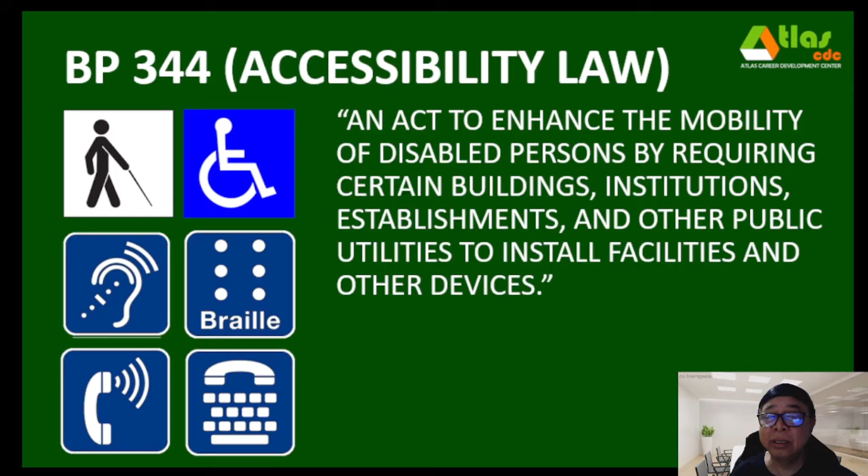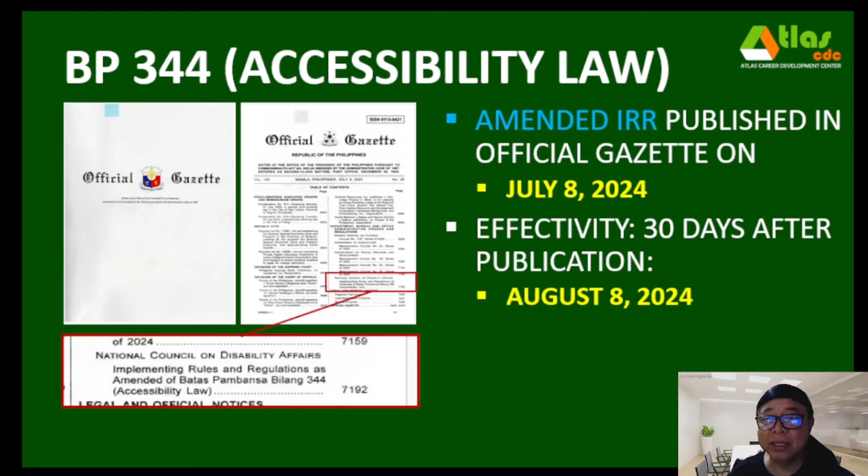BP344 is an act to enhance the mobility of disabled persons by requiring certain buildings, institutions, establishments, and other public utilities to install facilities and other devices in consideration of persons with disabilities. The IRR of BP344 was amended and published in the Official Gazette on July 8, 2024, and became effective 30 days after publication, on August 8, 2024.

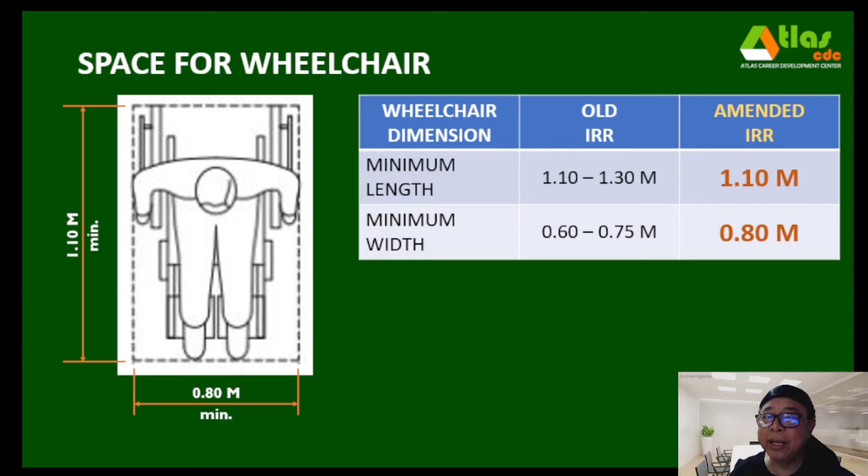So let us start with the new provisions, and this is on the anthropometrics pertaining to the requirements for wheelchair spaces. The new or amended IRR now requires that the wheelchair dimension will have a minimum length of 1.10 meters and a minimum width of 0.8 meters, compared to the old IRR which is of smaller dimension. This wheelchair dimension is to be used when planning for spaces where movement of wheelchair is required.

So if you have spaces for wheelchair, the minimum clear space to accommodate one wheelchair and one occupant will have a 900 mm width, in consideration of the 800 mm width of the wheelchair.

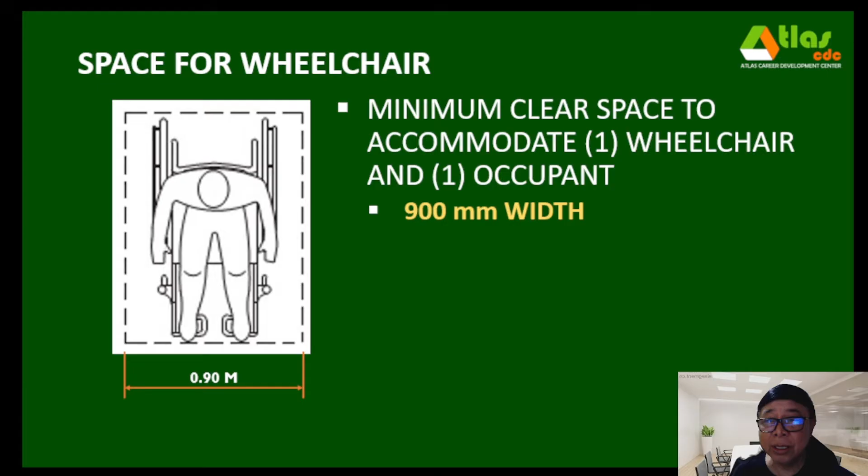For the turning space of wheelchair, this is the circle diameter turning space. The diameter now is at 1.8 meters, compared to the old IRR which is at 1.5. So we now have a bigger turning space.

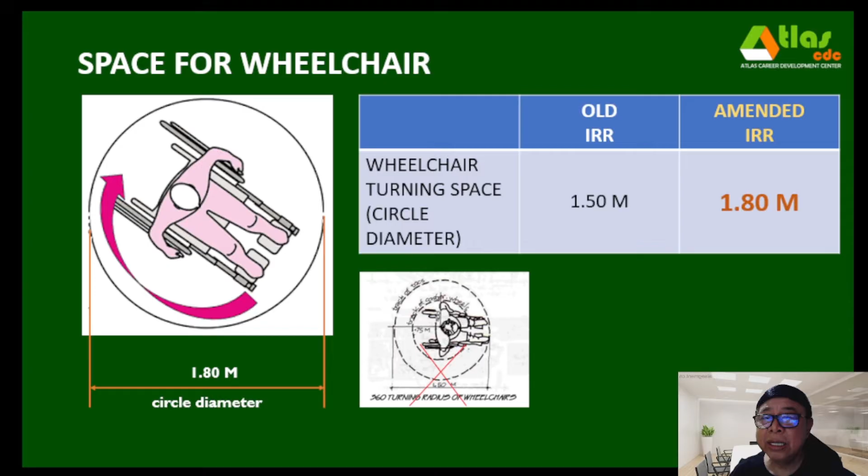For the comfortable clearance for knee and leg space under table, the minimum clearance here for table will be 0.70 meters, which is lower than the old IRR of 0.74.

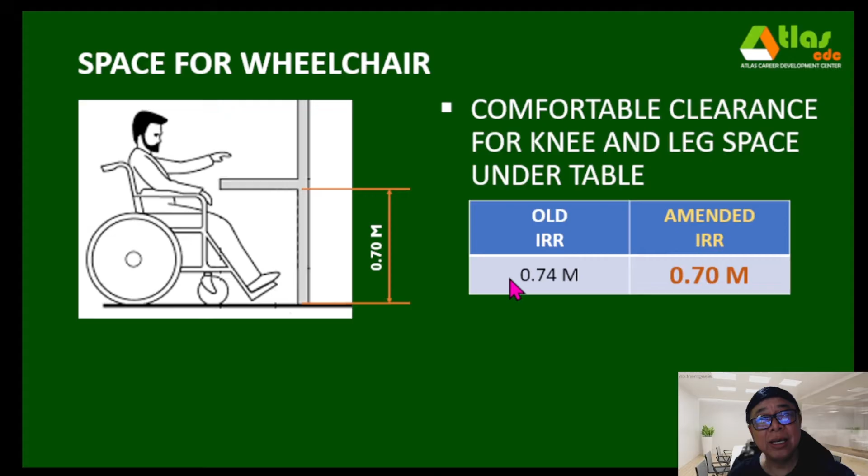Now for the reach of wheelchair users, 0.70 meters to 1.2 meters above the finished floor, and not less than 0.4 meters from room corners, for vertical forward reach. So if you have the wheelchair here, the forward reach, the maximum height is 1.2 meters above finished floor line maximum reach, and the lowest reach is 0.4 meters. This is the same as the old provision.

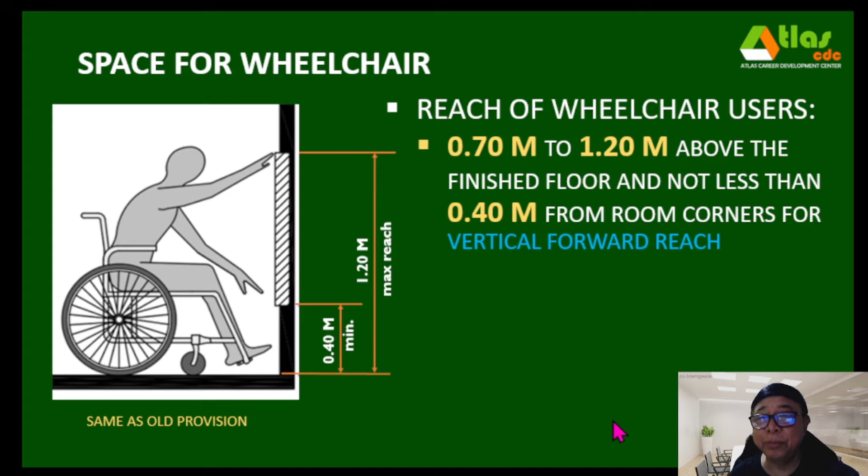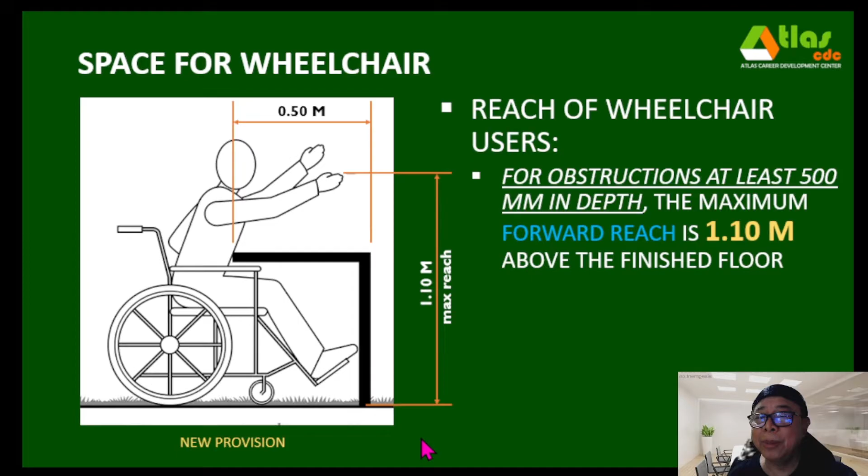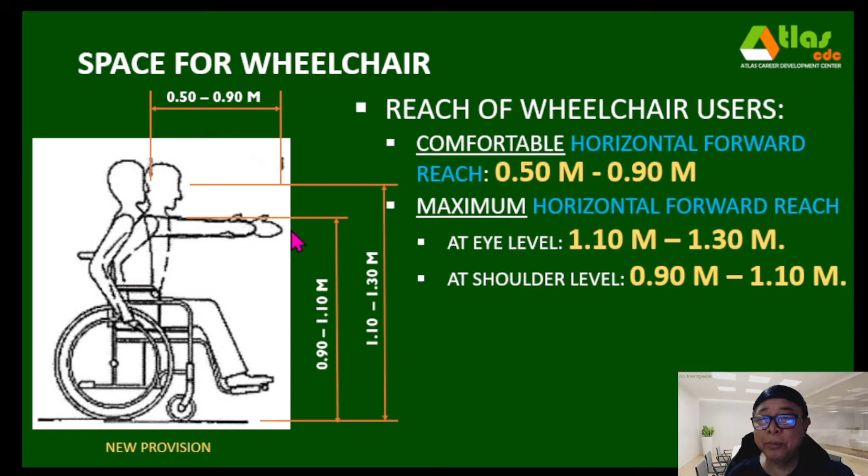On the other hand, a comfortable horizontal forward reach for wheelchair users will be at 0.5 to 0.9 meters. Comparing that with the maximum horizontal forward reach at eye level, that will be at 1.10 up to 1.30 meters, while the horizontal forward reach maximum at shoulder level will be at 0.9 to 1.10 meters.

For the side reach without obstruction for wheelchair users, the range will be from 0.2 as the lowest reach up to 1.30 meters above the floor for the maximum reach. So sideways, up to 1.3 meters, and the lowest reach here will be at 0.2 meters.

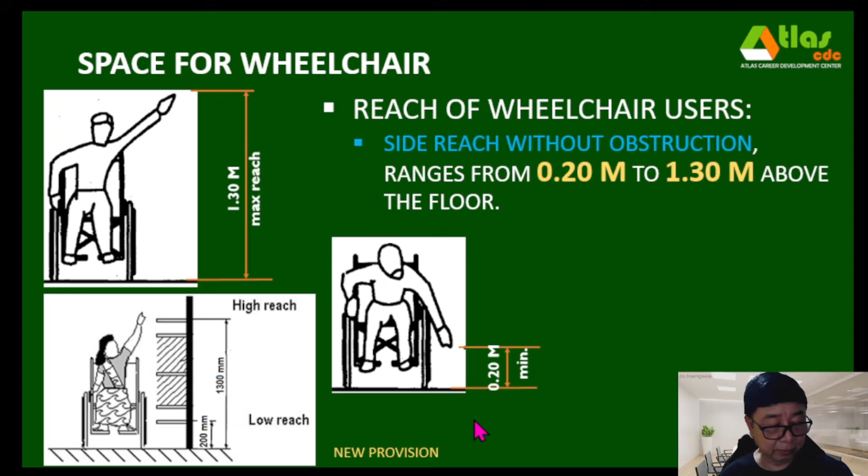For assembly places, we are to provide appropriate wheelchair seating spaces. So if you have a seating capacity of 4 to 50 seats, then you have to provide a minimum of 2 wheelchair seating spaces. And if the seating capacity is 51 to 300, you need to provide 4 wheelchair seating spaces. And if the seating capacity is 301 to 500, then you need 6 wheelchair seating spaces.

Take note that when seating capacity exceeds 500, an additional wheelchair seating space shall be provided for each total seating capacity increase of 100 seats. So it means that if you have 600 seats, then you need 7 wheelchair spaces.

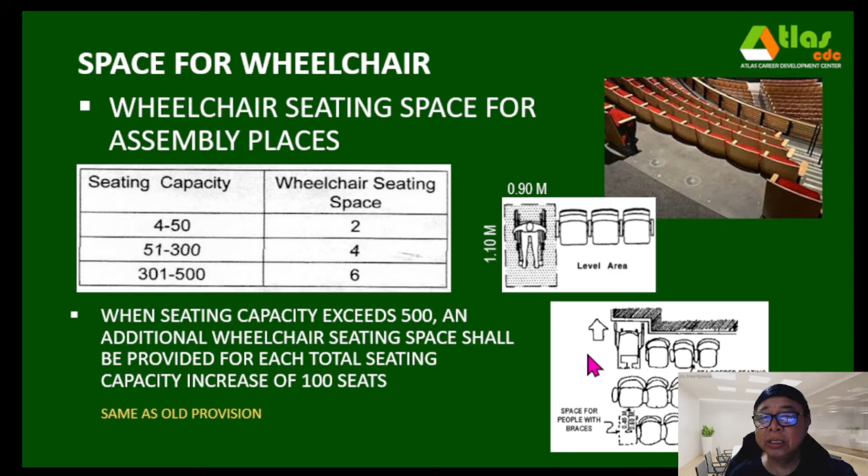The wheelchair space that you are to provide must have a width of 0.9, as mentioned earlier, and the length will consider the length of the wheelchair at 1.10. Usually, the wheelchair space shall be provided near the exit ways.

The next part of our discussion will be on the barrier-free facilities and features. So here we are going to discuss the accessible routes, and that will include ramps and stairs, drop sidewalk, drop curb, curb ramp, and curb cutout. These accessible routes shall be established within the 500-meter radius of the facility.

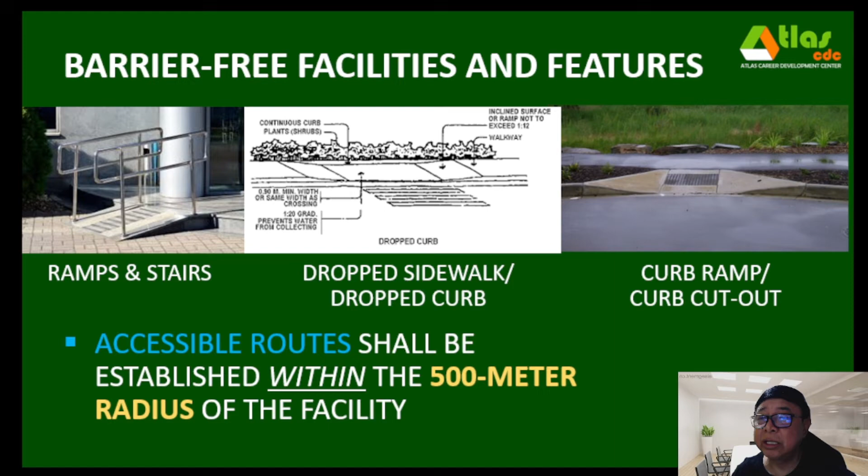So for this video, we will only be focusing first on ramps and stairs, and then we will discuss in the next video our requirements for drop sidewalks, drop curbs, the curb ramp or curb cutout, as well as parking spaces or the barrier-free facilities outside of buildings. So for now, we will concentrate first on the discussion for the requirements for ramps and stairs.

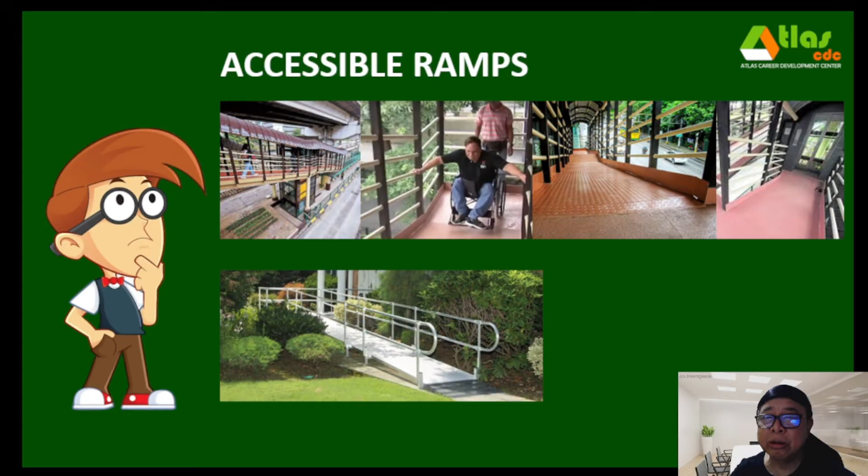For accessible ramps, we have to check the different components of ramps. If there will be changes in level, you are required to provide a ramp, except when it is already served by a drop sidewalk, a curb ramp, an elevator like this, or a mechanical device like this. So you have stairs, and you may not need to provide a ramp because you already have a mechanical device here, and this is a curb ramp.

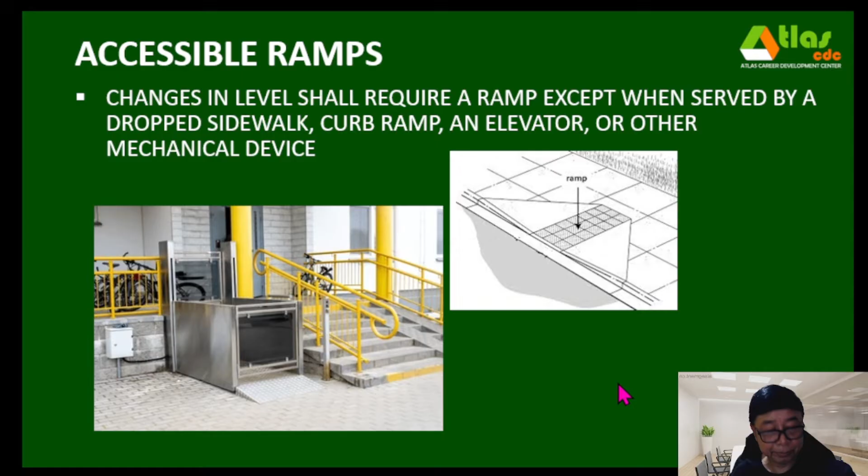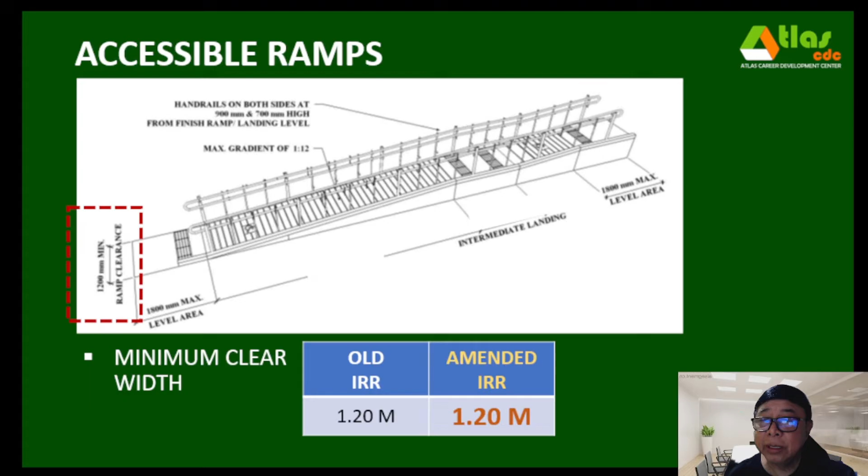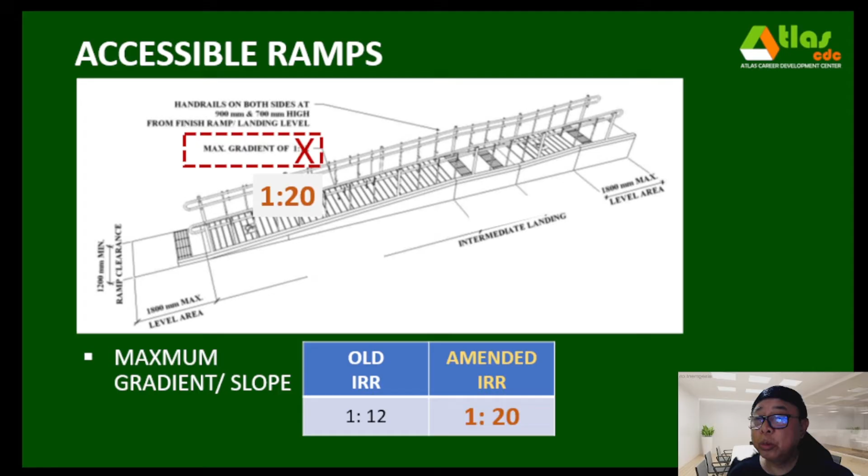If you are going to provide a ramp, the minimum clear width requirement is 1.2 meters, the same as in the old IRR. However, for the maximum gradient, the amended IRR now requires a 1:20 slope, meaning 1 unit rise for every 20 units distance. So 1:12 has now been superseded by 1:20.

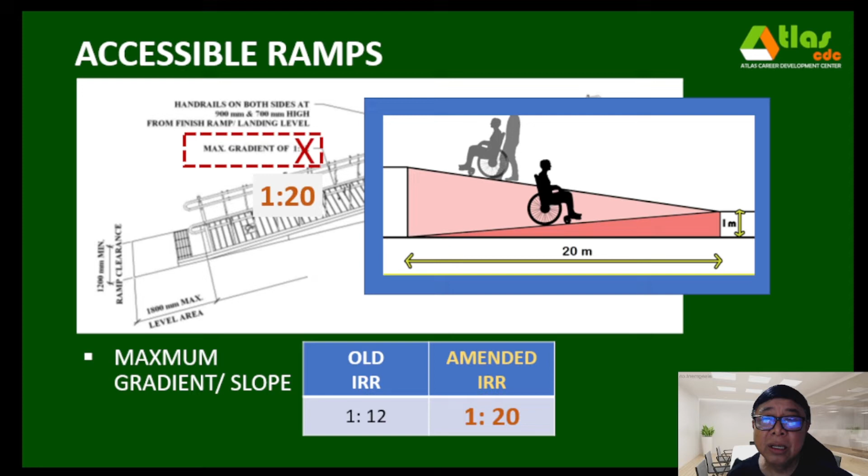This means for every 1 meter rise, you have a 20 meter distance. But it doesn't mean your ramp will have a straight run of 20 meters — you have to provide a landing at a certain point. In special cases, depending on the length to be covered, if you will have a very long ramp, then a steeper gradient may be allowed, up to a maximum slope of 1:15.

So for this gradient, if you have a straight run for one ramp, you can have a maximum distance of 10.5 meters, which means the maximum rise there will be 0.70 if you are using a 1:15 gradient.

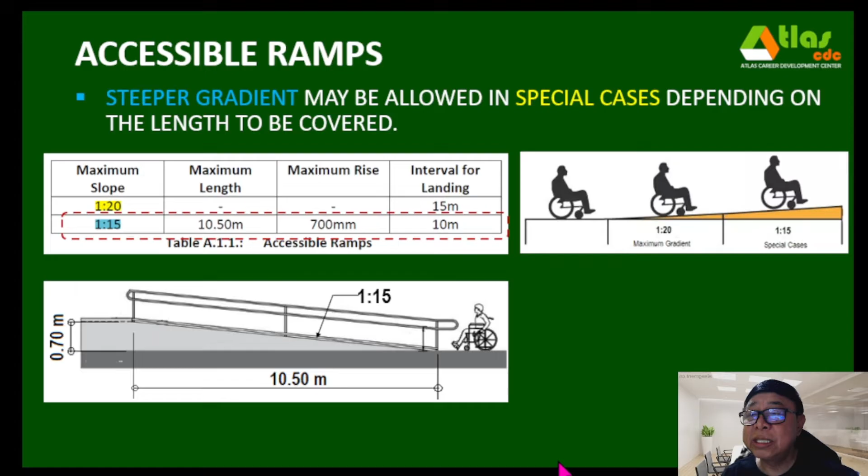If you have a ramp with a total length of more than 10.5 meters, or longer than that, then you are to provide an intermediate landing, which shall have a minimum length of 1.8 meters.

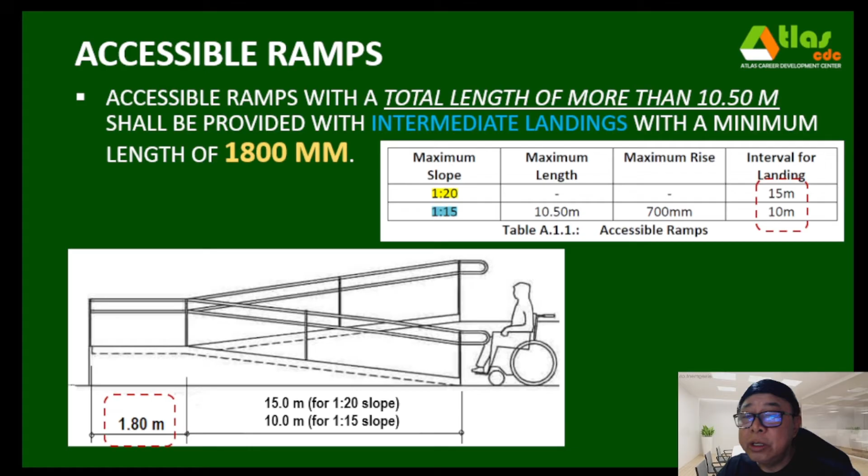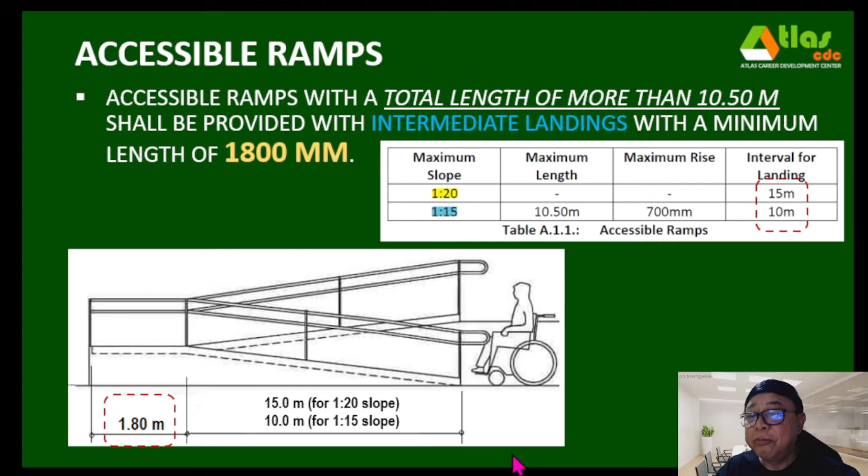If your slope is 1:20, then the distance of the ramp can be up to 15 meters, while if your slope is 1:15, then your maximum distance will be 10 meters for the run of the ramp. You are also to provide a level area at the lower end as well as the upper end of the ramp, at 1.8 meters.

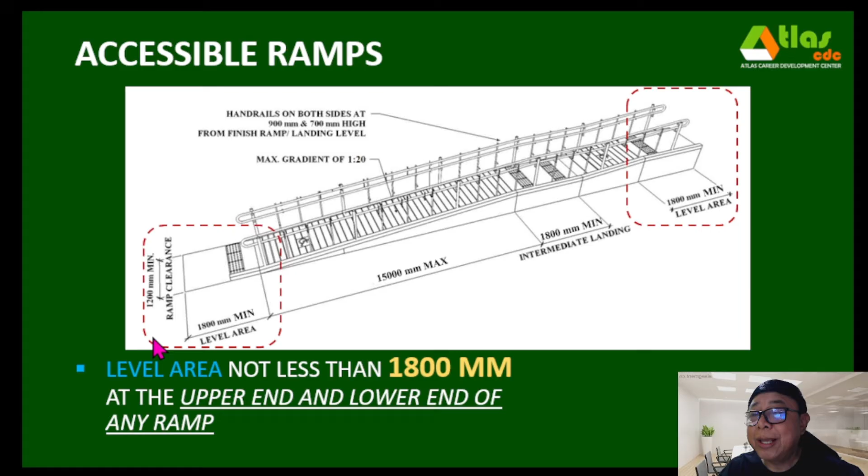And at both sides of the ramp, you are to provide a raised edge like this, which shall have a minimum height of 100 mm.

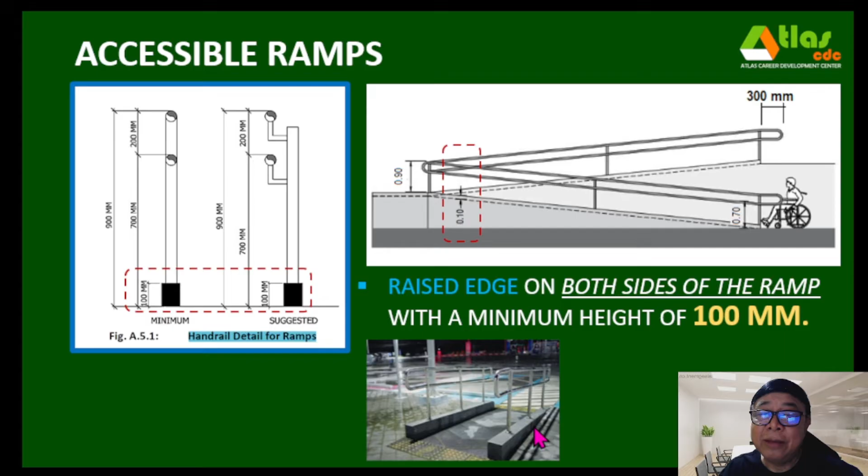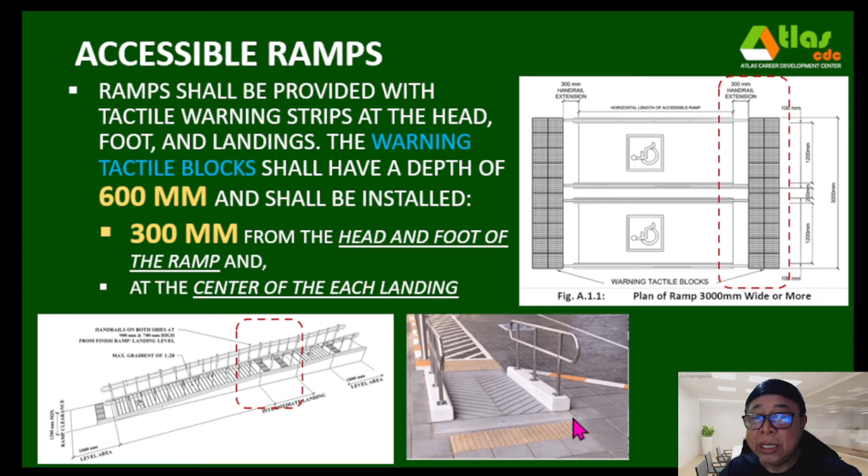The ramp shall be provided with tactile warning strips at the head, at the top, at the foot, as well as at landings if you have them. The warning tactile block shall have a depth or width of 600 mm, at a distance of 300 mm from the edge of the ramp, or at the center of the landing. So this one is 300 mm, and this one should be 600 mm wide with the tactile strip.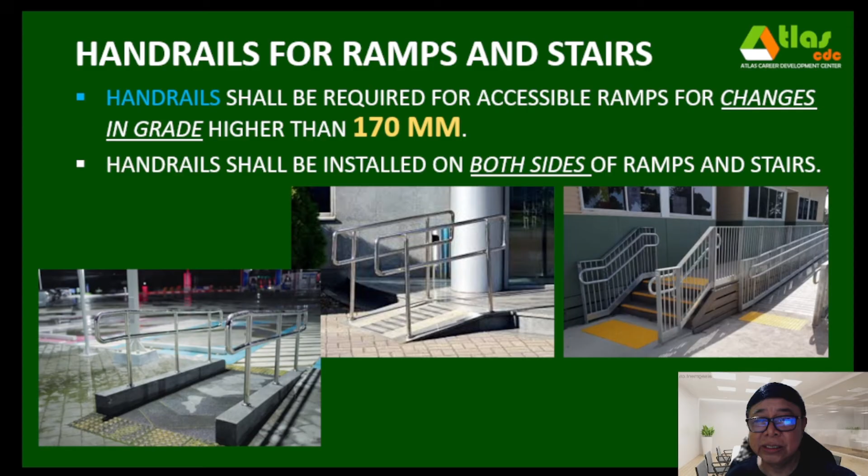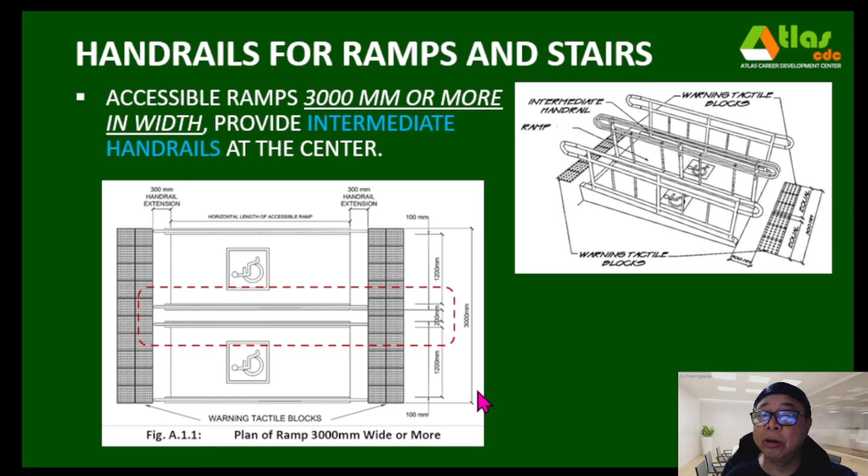For accessible ramps at 3 meters or more, you are to provide intermediate handrails at the center. The handrails on both sides of the ramps and stairs will be at 700 mm and 900 mm from the finished floor of the ramp and stair to the top of the handrails.

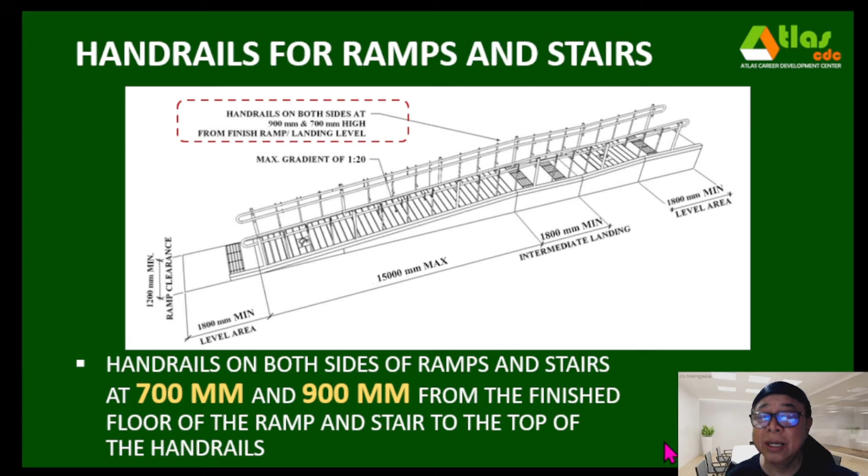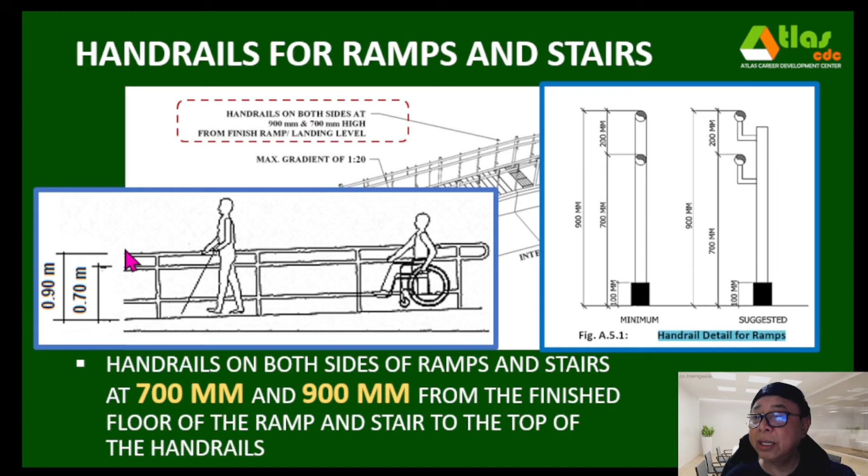This 0.70 meter high handrail is to be used for persons on wheelchairs, while the 0.90 meters high handrail will be used for persons walking. A 300 mm horizontal extension of the handrail shall be required at the upper and lower end of ramps and staircases.

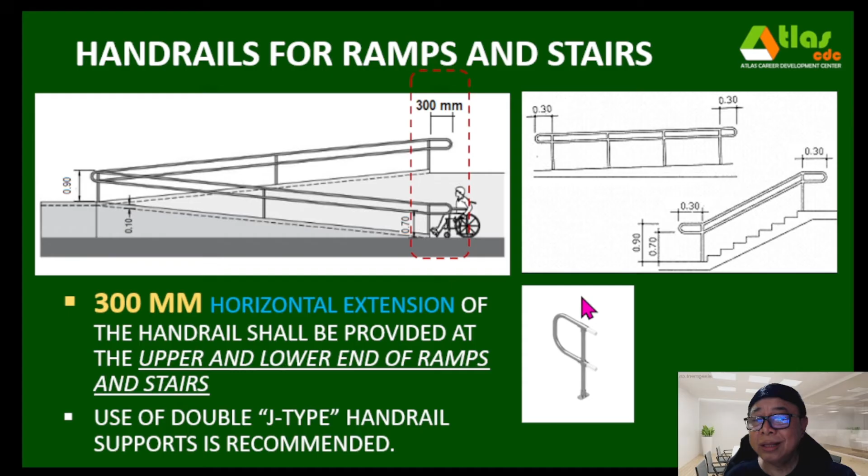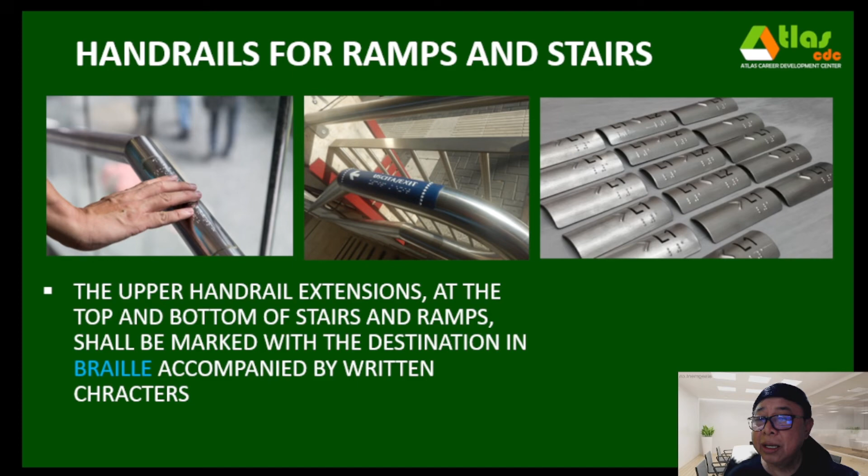The recommended is a double J-type handrail support at this end. The upper handrail extensions at the top and bottom of the stairs and ramps shall be marked with the destination in Braille, accompanied also by written characters.

Handrails and grab bars that require full grips shall have a round cross-section with a diameter of 1 3/16 inch or 30 mm to 1 37/64 inch or 40 mm around, as compared to the old provision of only 30 to 50 mm, a little larger.

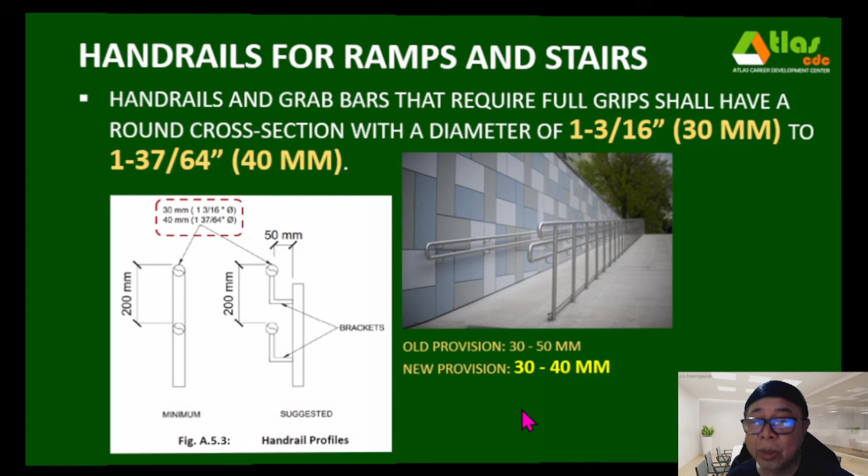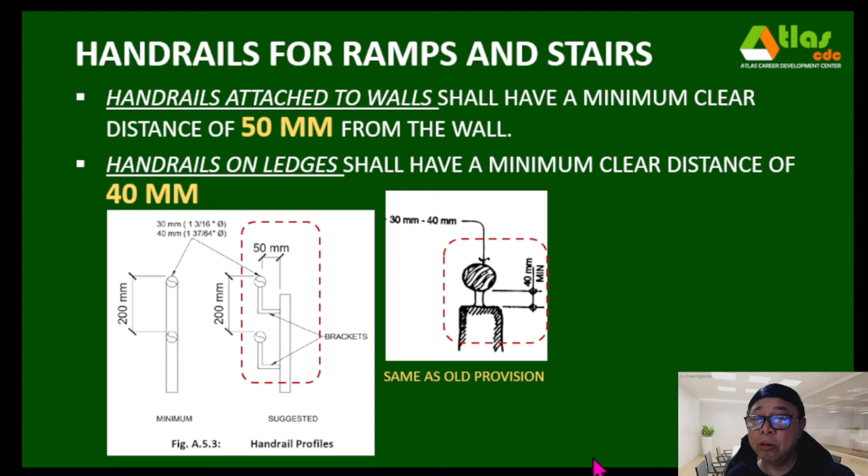Handrail shall be continuous throughout the entire length of the ramp or stairs and around landings less than 2.1 meters in length, except where it is intersected by an alternative path of travel or has an entry door leading into it.

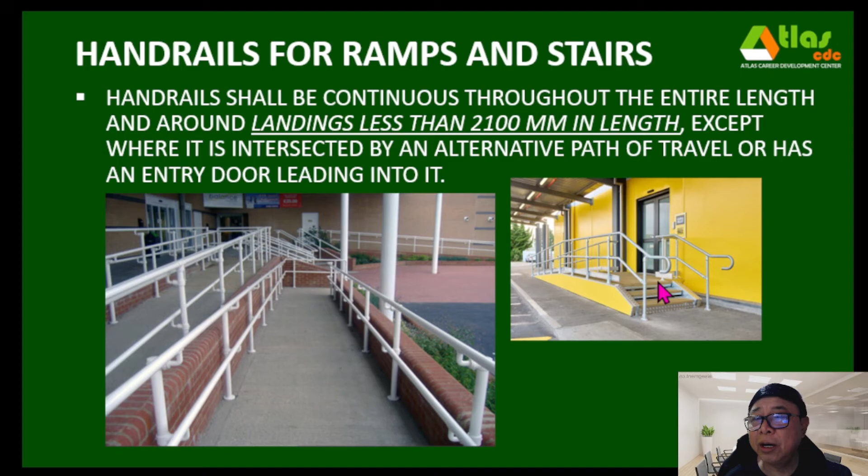The stair handrail shall be bent down at a radius of 150 mm back to the newel post. This is for the staircases.

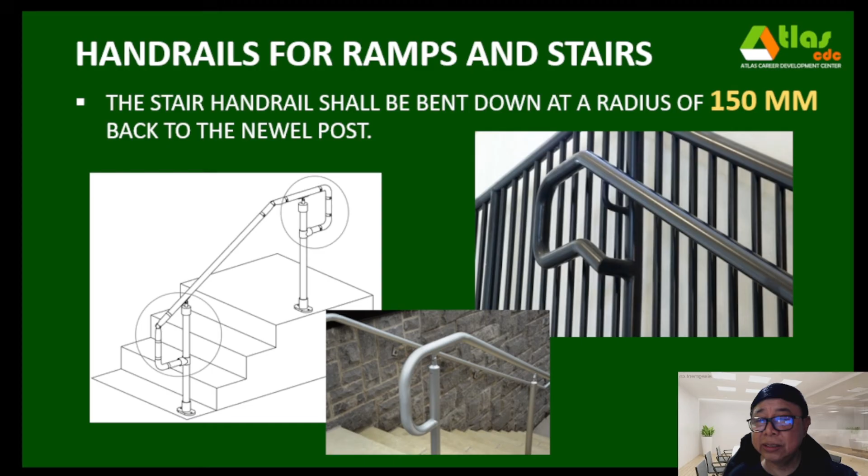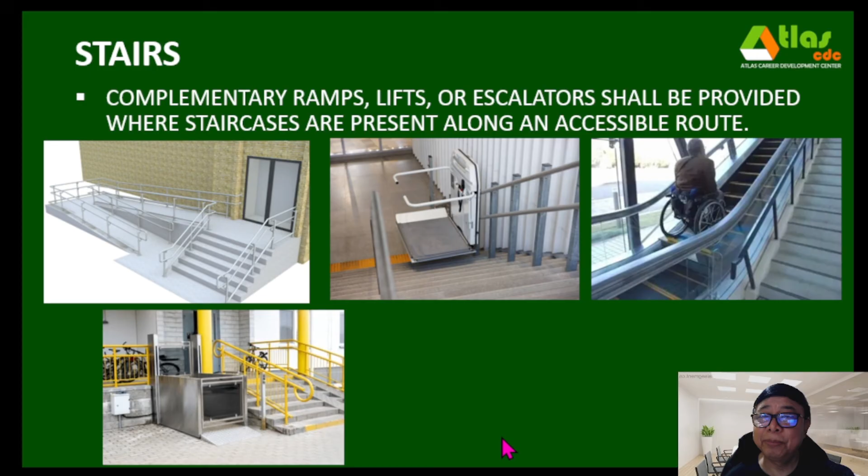Complementary ramps like this, or lifts, or escalators shall be provided where staircases are present along an accessible route. This kind of facility shows concern for the needs of wheelchair users.

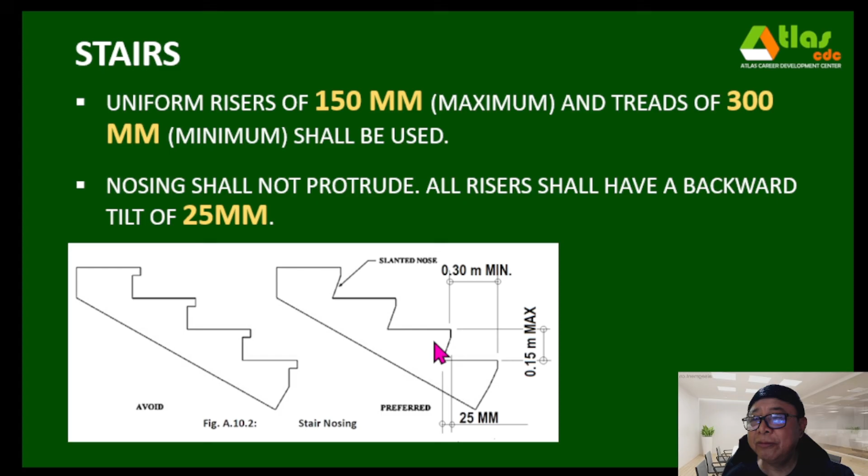So we now proceed with the stair details. The uniform risers will be at 150 mm maximum, so the maximum height of the riser will be at 0.15, and the stair tread will have a minimum of 300 mm. Nosing shall not protrude like this. Rather, all risers shall have a backward tilt of 25 mm.

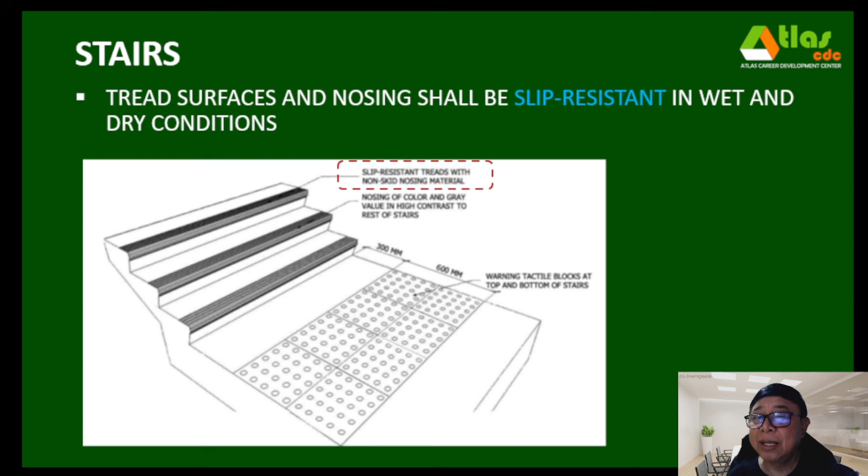The tread surfaces and nosing shall be slip resistant in wet and dry conditions. The stair nosing also shall be durable and slip resistant in wet and dry conditions with a minimum luminance contrast of 30% to the stair risers and treads so that it is visible for partially blind persons.

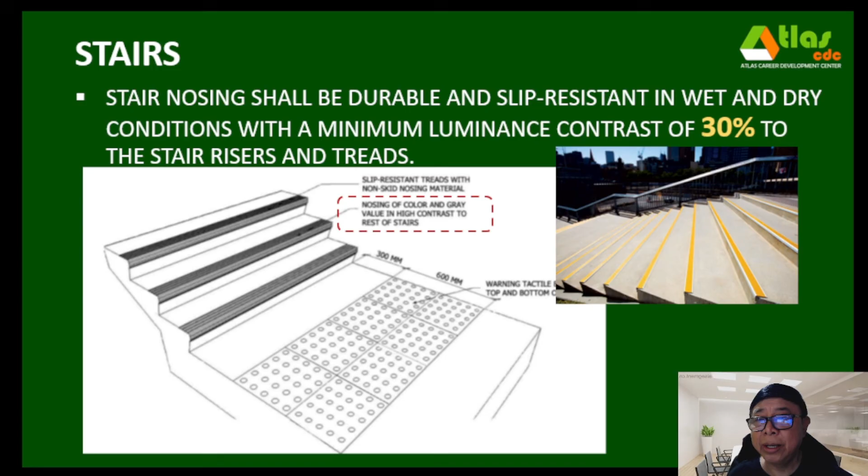A tactile strip or warning tactile block like this shall be provided with a depth of 600 mm with a length spanning the entire width of the stairs and shall be installed at a 300 mm distance before hazardous areas or intended stops, such as sudden changes in floor levels and at the top, bottom, and intermediate landing of stairs.

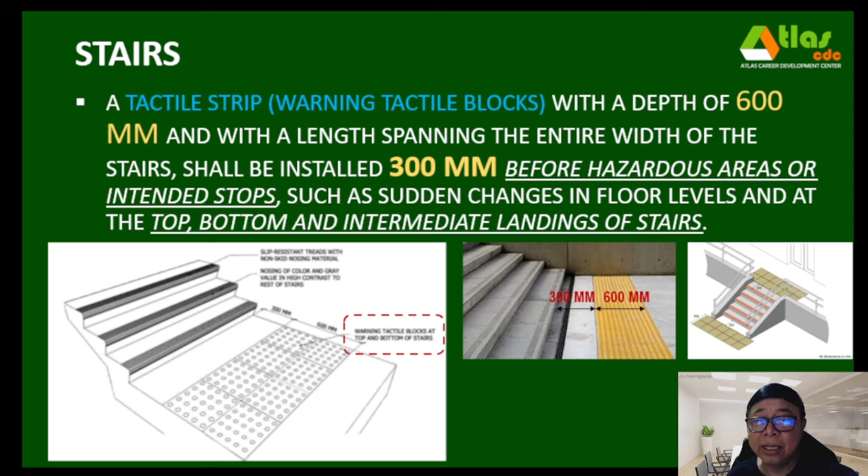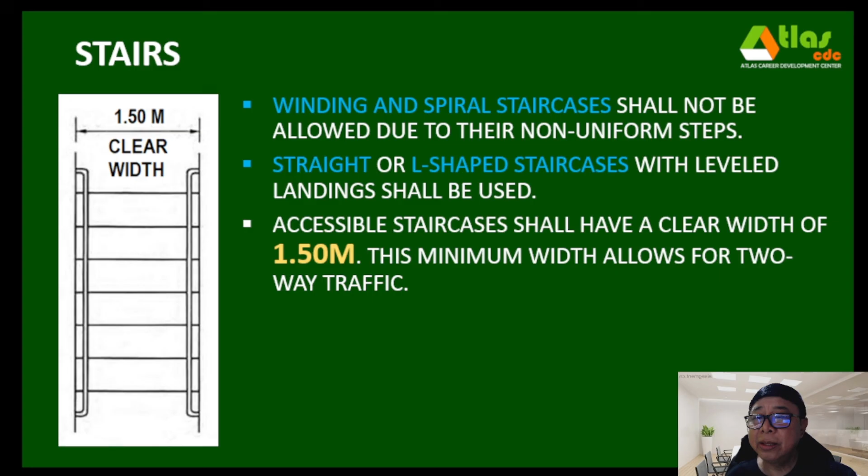Winding and spiral staircases shall not be allowed due to their non-uniform steps. Rather, straight or L-shaped staircases with leveled landings shall be used. Accessible staircases shall have a clear width of 1.5 meters, and this minimum width allows for two-way traffic.

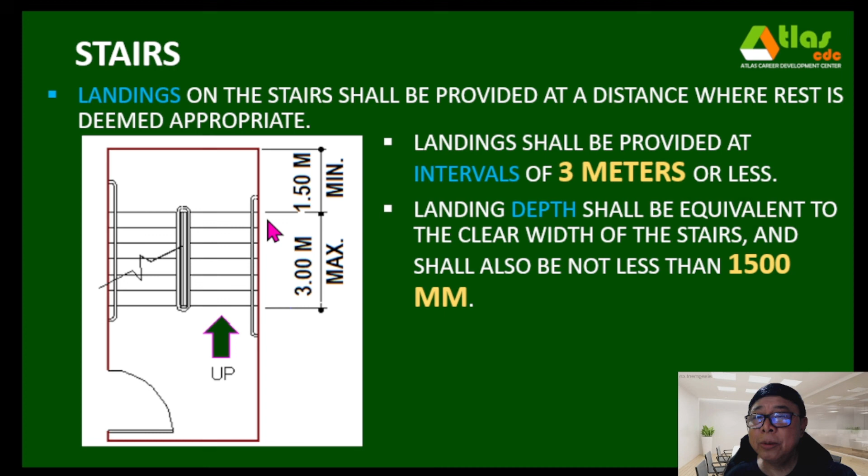Landings on the staircase shall be provided at a distance where rest is deemed appropriate, so that if you have an interval of 3 meters maximum, then you are to provide a landing with a minimum depth of 1.5 meters. A clear space of at least 1.2 meters in depth shall be provided before and after a staircase.

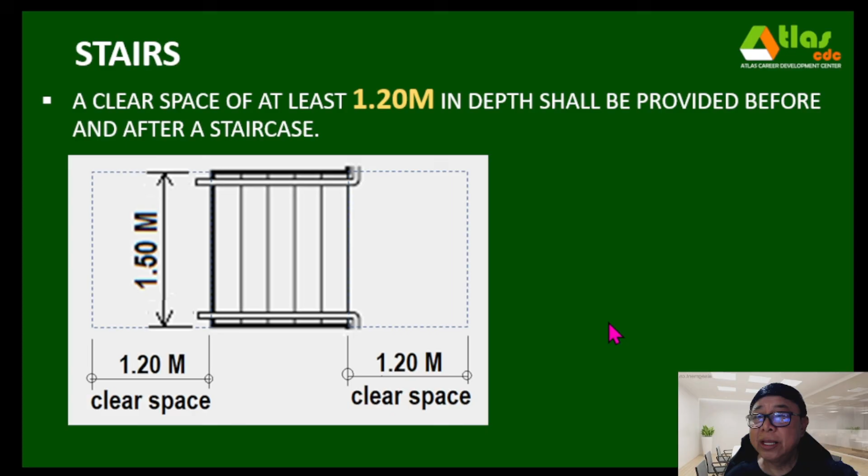No obstruction whatsoever in that particular space. The landing shall be unobstructed by protrusions such as door swings. So you are to provide that 1.2 meters clear distance or clear space from the edge of the staircase, and no door shall protrude within that space.

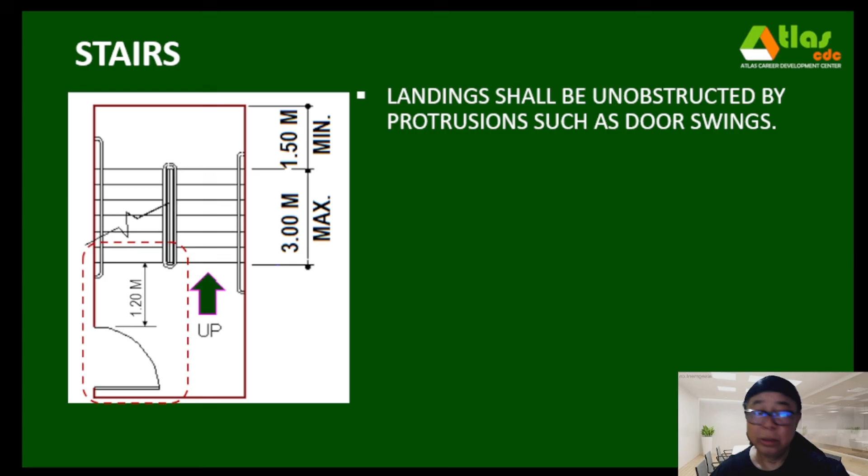A raised edge with a minimum of 100 mm in height shall be installed on both sides of a staircase except when a wall is in place. So this is similar to the requirement for ramps.

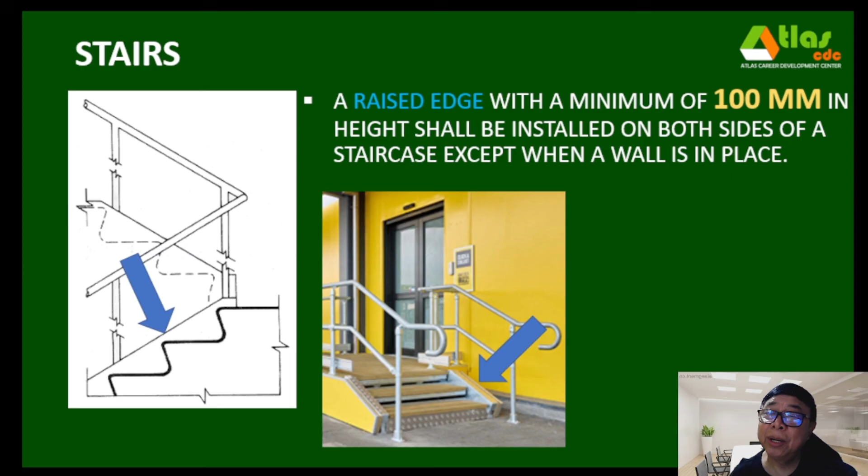That is the end of my presentation for the first part of my discussion for the amended IRR of BP344. So watch out for my succeeding videos.